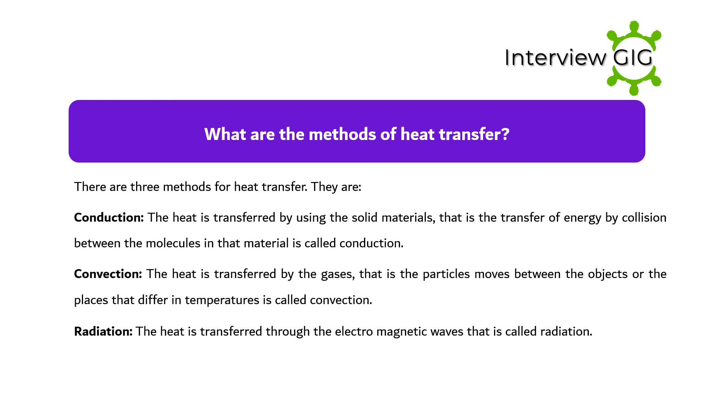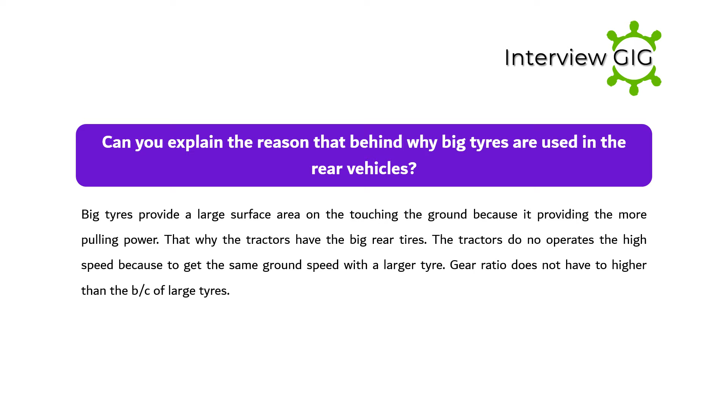Can you explain why big tires are used in the rear of vehicles? Big tires provide a large surface area in contact with the ground, providing more pulling power. That's why tractors have big rear tires. Tractors do not operate at high speed because a larger tire achieves the same ground speed, so the gear ratio does not have to be higher due to the large tires.

What is the difference between BS2 and BS3 engines? The main difference between BS2 and BS3 engines lies in the catalytic converter. In the BS3 engine, the catalytic converter is used to reduce the formation of HC and CO. In the BS2 engine, the catalytic converter is not used for the formation of HC and CO. In the BS3 engine, there are no harmful emissions of HC and CO.

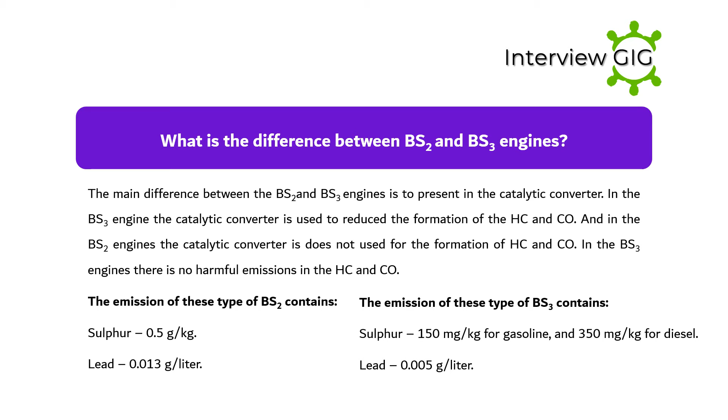The emission standards for BS2 contain sulfur at 0.5 g/kg and lead at 0.013 g/liter. For BS3, sulfur is 150 milligrams per kilogram for gasoline and 350 mg per kilogram for diesel, and lead is 0.005 g/liter. What are the differences between the BS4 engine and the BS6 engine?

BS stands for Bharat Stage Emission Standards, which were introduced by the central government in 2000 with an aim to curb the pollutants emitted from vehicles employing combustion engines. Both BS4 and BS6 are emission norms that set the maximum permissible limit for pollutants coming out of a vehicle's exhaust.

The main difference is that a BS6 engine requires fuel containing 5 times lower sulfur traces than a BS4 engine. Also, nitrogen oxide (NOx) levels under BS6 norms have been lowered by 70% for diesel and 25% for petrol engines. Under the BS6 norm, the limit of pollution has been drastically reduced.

While the norm for NOx from diesel vehicles in BS4 is 250 mg per kilometer, it is reduced to 80 mg per kilometer in BS6 emission norms. The HC plus NOx has been reduced from 300 mg per kilometer in BS4 to 170 mg per kilometer, while the PM level has been decreased from 25 mg per kilometer to 4.5 mg per kilometer.

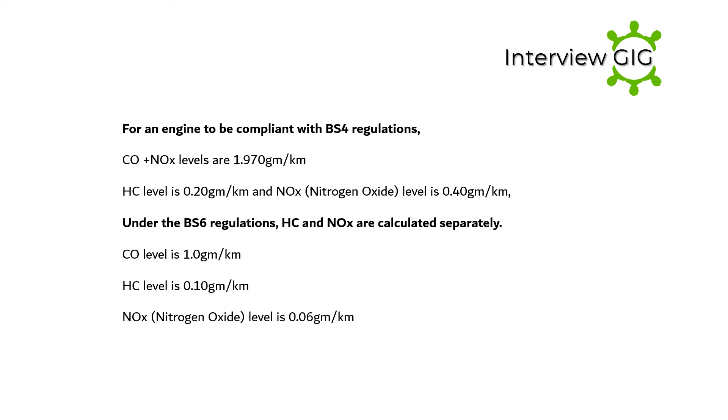Under the BS6 regulations, HC and NOx are calculated separately. CO level is 1.0 grams per kilometer. HC level is 0.10 grams per kilometer. NOx, nitrogen oxide, level is 0.06 grams per kilometer.

Can you define BHP and how can we measure BHP? BHP stands for brake horsepower. BHP reflects the power of the brakes of engine, and it is used to measure how much power will be required to stop the engine, that is, to stop the rotational motion of the engine. This power is measured by using the dynamometer.

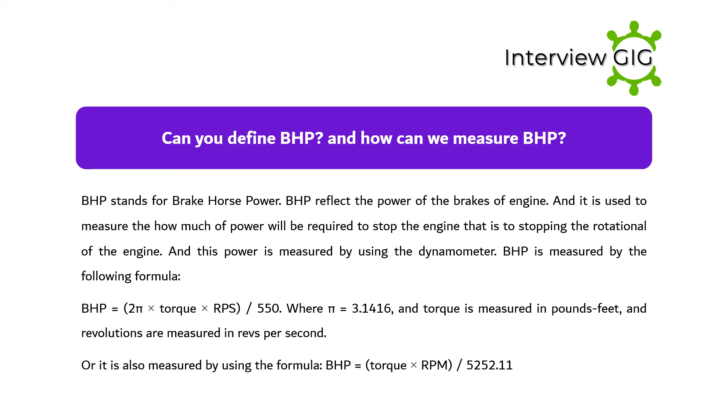BHP is measured by the following formula: BHP is equal to 2 pi times torque times RPS, divided by 550, where pi is equal to 3.1416, torque is measured in pounds-feet and revolutions are measured in revs per second. Or it is also measured by using the formula BHP is equal to torque times RPM, divided by 5252.11.

What is the difference between two-stroke engines and four-stroke engines? Both have the same components but don't work in the same way. In a two-stroke engine, in the crankshaft, there is one working stroke in each cylinder per revolution. The moving parts are fewer and lightweight. Two-stroke engine construction is simple and easily maintained, but it causes more noise and disturbance.

In a four-stroke engine, in the crankshaft, there is one working stroke in each cylinder per 2 revolutions. The moving parts are more, with higher weight and larger size. Four-stroke engine construction is more complicated due to the mechanism, but it produces less noise.

Can you define octane number and cetane number, and their difference? Octane number: under standard operational conditions, the percentage of isooctane present in the mixture of isooctane and heptane is called the octane number. Octane number is the rating of the SI engines.

Cetane number: cetane is one of the types of chemical compound called hexadecane. Cetane number is defined as the percentage by volume of N-hexadecane in the mixture of N-hexadecane and 1-methylnaphthalene, which is responsible for providing the ignition delay period. It measures how quickly the fuel starts burning inside the compression engine.

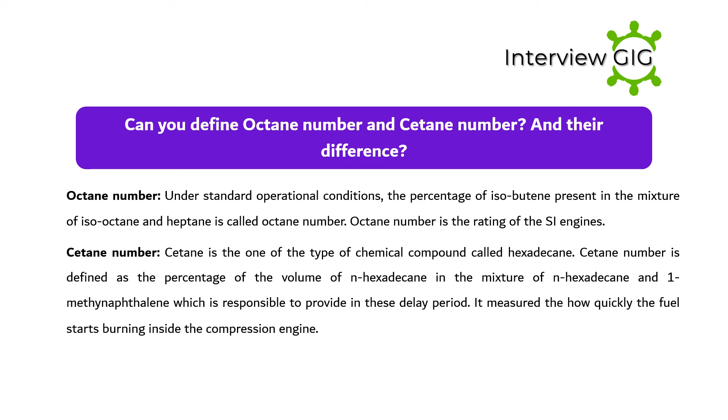Octane number and cetane number are both standard measures of the tendency of fuel to spontaneously ignite. Octane number is used to measure the performance of gasoline, and cetane number is used to measure the performance of diesel. A fuel with a high octane number has a low cetane number, and a fuel with a high cetane number has a low octane number. That's why we cannot use petrol in a diesel engine, or diesel in a petrol engine.

What is injector pressure in heavy vehicles, and why is it used? Injection pressure is the pressure at which fuel is inserted or injected into the engine of the vehicle. In heavy vehicles or tractors, the injector pressure is 220 kg/cm2. Injector pressure is used to set up the standard fuel injector in the vehicle presented.

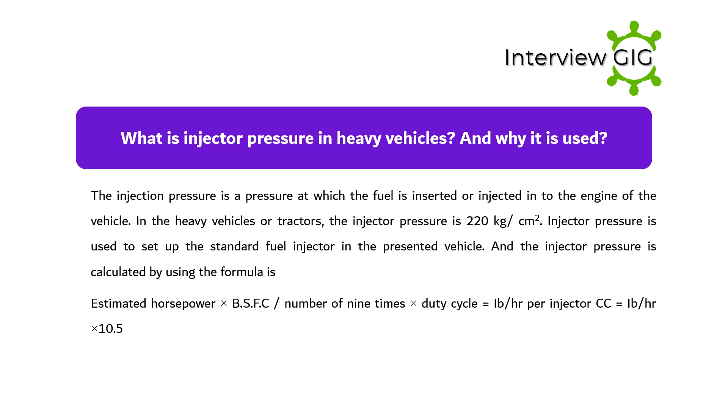The injector pressure is calculated by using the formula: estimated horsepower times BSFC divided by number of injectors times duty cycle, equals lb/hr per injector cc, equals lb/hr times 10.5.

Explain what happens when someone adds oil to the fuel of a 4-stroke bike engine. When we add oil to the fuel of a 4-stroke engine, it will speed up the damage of the engine, causing higher wear and tear of the cylinder liners and piston, and will damage the piston. Abnormal sounds and dark smoke are generated by the engine due to abnormal combustion, knocking and detonation. So we should not mix oil with the fuel of a 4-stroke engine.

Can you explain back compression in an engine? It indicates the compressive capability of the engine. A diesel engine compresses at a ratio of 14:1, and not higher than 25:1. Higher compression is used for better efficiency of the engine. When the engine compression is reduced due to a deformed head gasket, it leads the crankcase to emit thick black smoke.